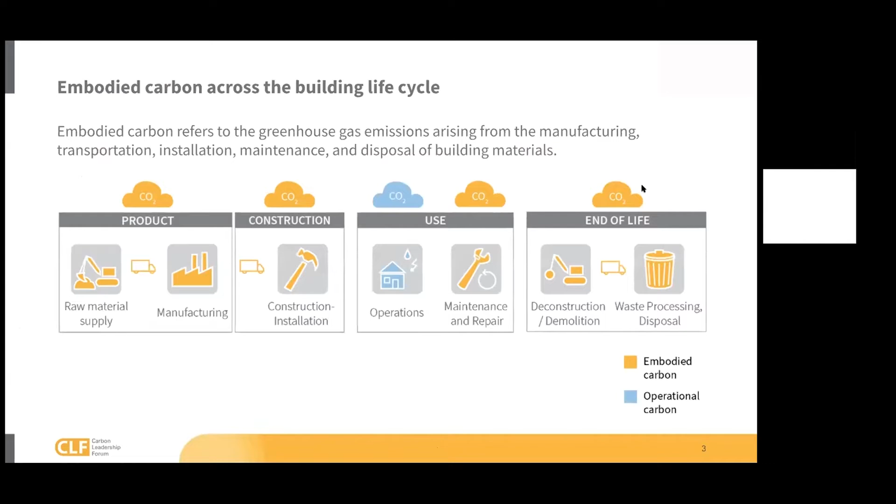So starting out, since I'm going to talk about embodied carbon a lot, just making sure we're on the same page about what that means. Embodied carbon refers to the greenhouse gas emissions arising from the manufacturing, transportation, installation, maintenance, and disposal of building materials. In contrast to operational carbon, which is what we think about when we're running the building, keeping the lights on. And specifically, we often talk about upfront embodied carbon here in the product stage. So thinking about material extraction and manufacturing, transportation from extraction to manufacturing.

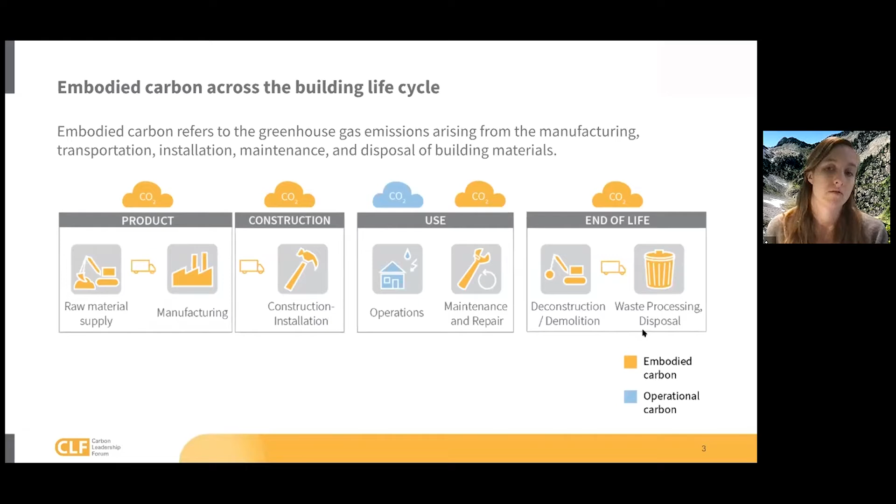But there's also opportunities across the building life cycle. And so today I'm going to talk some about the product stage and some about the entire building life cycle. So including construction as well as maintenance and repair during the use of a building, and then really importantly, the end of life opportunities, whether that's deconstruction and demolition or waste processing. So that's where we can harvest building materials from existing buildings or reprocess them into new materials possibly.

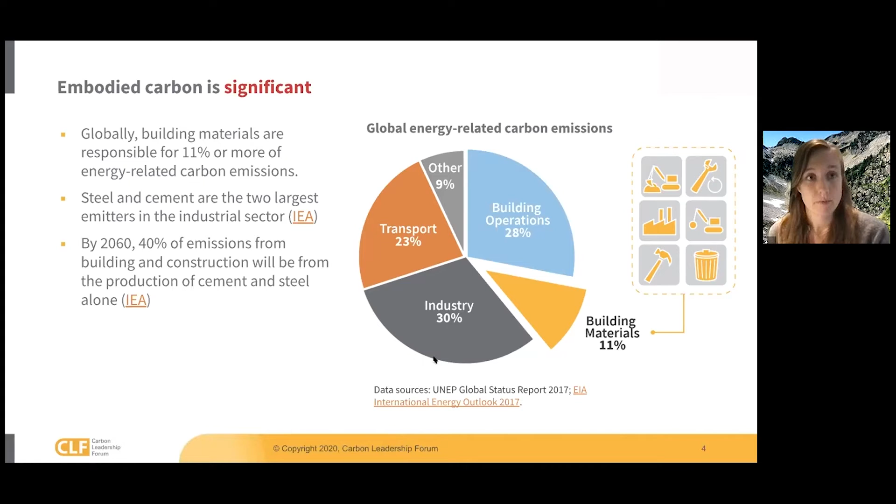And these are both really difficult to abate emission sectors, industry in particular. And so it's one of the reasons that I think our work is really exciting, because there's a lot to be done, but a lot of opportunity. And steel and cement are the two largest emitters in the industrial sector and are obviously key building materials. And so those are two of the many large opportunities we have in this sector.

Another key piece of embodied carbon is that it's right now largely missing from global climate policy. And what I mean by that is that because the majority of a product's embodied carbon footprint is generated across its supply chain, which is often global, the way that we do greenhouse gas emissions accounting, there's a lot of finger pointing, and everyone is saying that someone else should be accounting for this carbon. So whether you're a company or a city or a country, you're looking at the emissions that are within your geographic borders. And so if the supply chain emissions are generated outside of those borders, then we're not accounting for them.

And that means that if we're looking at policies that are only aimed at the facility level, then we're going to miss a lot of opportunity to reduce emissions that are related to materials. And so one thing we've been looking at is what are the opportunities for policies that are at that product level where something is being used, because there's really a much broader range of strategies available there for reducing embodied carbon.

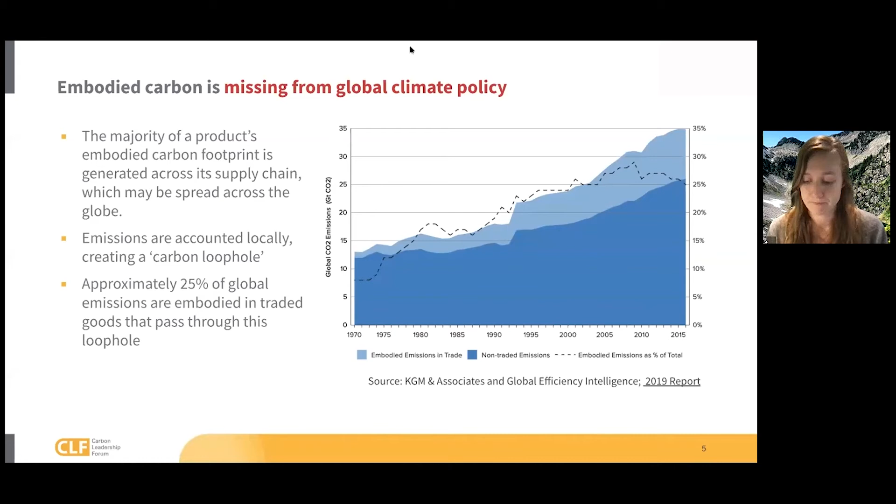So diving in a little bit about what those strategies are, we think of them really across, they sort of align with the way that buildings are designed and eventually the materials are selected for buildings. So before you've started to design a building, when you're just thinking about the project, that's really when there's the largest opportunity for reusing materials and buildings. And so either adaptive reuse of entire buildings or salvaging specific materials, designing smaller footprint, designing for disassembly, to reuse those materials later in life.

As you are getting further into the design of the building, this is when architects, engineers, and others on the design team can really step up, and you can look at material efficiency, look at the shape of the building, as well as choosing between different sort of systems, whether that's a structural system or a building envelope. This is where you can think about things like, should this building structural system be concrete? Should it be mass timber? Should it be steel? Those sort of high level decisions can be made at this stage with tools like whole building lifecycle assessment.

And then the procurement stage, this is when you've already decided what materials you're going to use. And then there's a different suite of tools available for that stage. So the question is not, should I use concrete or should I use steel? The question is, what is the best possible concrete available that meets my performance specifications? This is a really important distinction because depending on what stage you are at, there are different tools available for you to understand what solutions are possible.

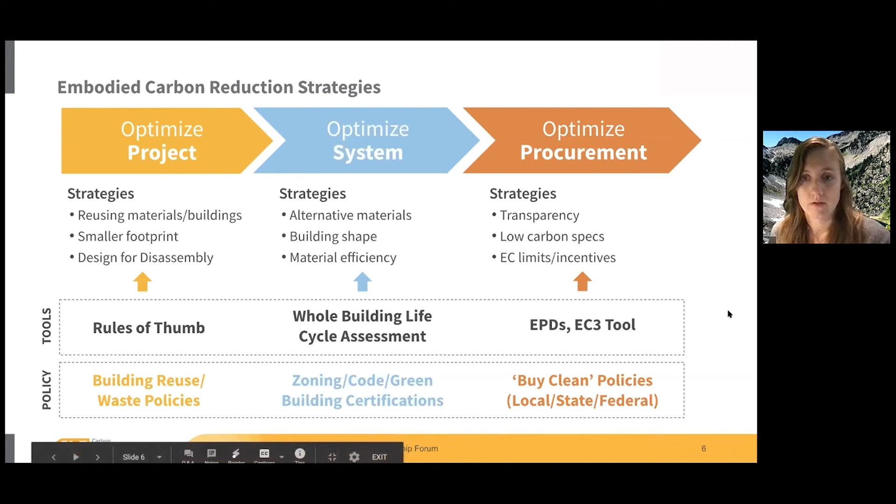So what we're really excited about is performance-based technology agnostic policy solutions that are encouraging this suite of strategies. And so the reason I'm highlighting these two approaches, they're both necessary and complementary, and they sort of activate different kinds of solutions. So from the building approach, you're using whole building LCA to measure performance, to drive that sort of what is the number that you need to be below that can continually improve from. And this incentivizes architects and engineers to design a lower carbon building.

So this really encourages the use of newer innovative materials. It encourages building material reuse. It's the world of strategies that sort of happen when you're still making decisions about the building, how it's going to come together, how it's shaped, how efficient you can be with your structural system, a whole range of solutions.

The material approach is also really important though, because it can incentivize manufacturers to invest in clean manufacturing practices, because it's saying, what is the best possible steel that I can buy? And the tool we have for that is called Environmental Product Declaration. And this can be used to measure the performance of a specific product, of a specific supply chain. And as I said, this is key for low carbon technology adoption, particularly for products that can't really be easily replaced just because their performance function is so specific and unique. That may not always be the case, but with current technology available, that is the case, and also they're a great solution for transportation and infrastructure policy.

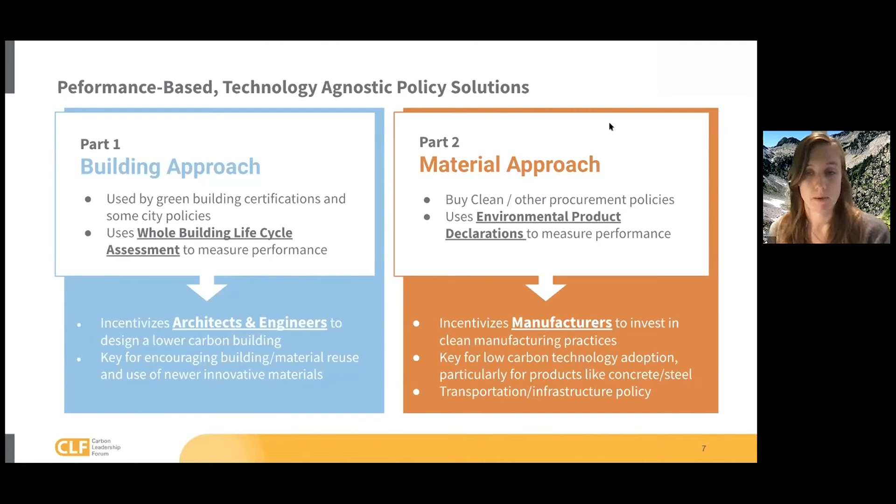And just to say a little bit more about what an EPD is, if you're not familiar, it's often referred to as a nutrition label for building materials. Although a better metaphor might be the mileage per gallon rating on a car. It's directionally accurate. It's good enough to create policy around and to compare equivalent products. Is it absolutely perfect and exactly how your car performs every day? No, that depends on the user. But it is close enough to be able to make key decisions about comparing products if you're comparing functionally equivalent products.

And that latter category, the material approach, is what we're seeing growing really quickly right now in policy in the US. So there's a federal program that's been proposed, the CLEAN Future Act. There was a similar act proposed previous to that in the Senate. There are 6 bills introduced in 2021 in Washington, Minnesota, Oregon, New York, New Jersey, and most recently Connecticut, and some are buy clean, and then some are focused specifically on low carbon concrete.

California passed a Buy Clean bill in 2017 and just recently published the first global warming potential limits for the materials that were included in that bill. So that was for steel, insulation or mineral wool insulation, and glass.

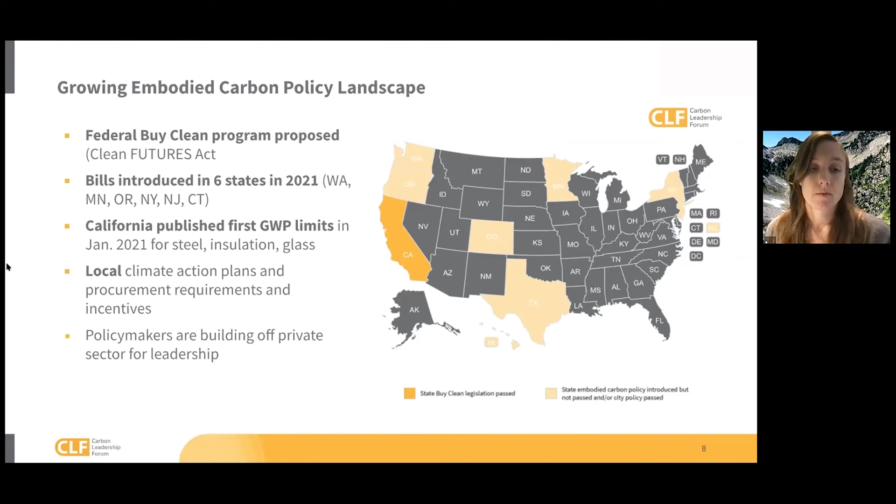And then we see a huge range of local action. I highlighted a few: climate action plans, procurement requirements and incentives, some building codes. And a lot of these are building off of private sector leadership that has looked at similar policies.